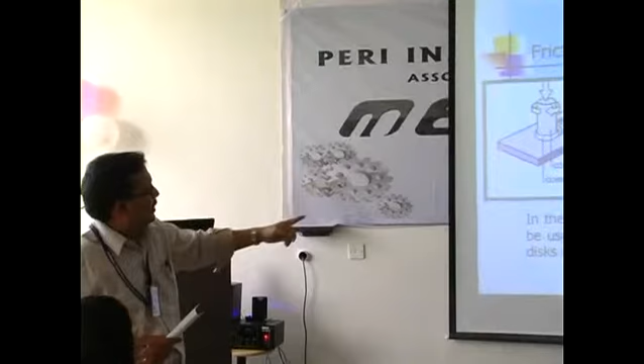So by traversing a workpiece underneath a rotating consumable, deposits can be laid onto the workpiece. See, machining you do normally, what we do, the purpose of machining is to remove the metal. You want to shape a particular component, you melt it, pour it in a cavity, and after solidification you get a component. Or otherwise, you have a component, remove the unwanted portion, you get a component. Or otherwise, you heat it to a red hot condition, blow it, make it to the required shape, you get the component. But this particular process is different - you have a material, you apply metal over it to get the required shape.

Are you able to understand what I mean? This particular technique, what do you call it? You call this one friction surfacing. This is a wonderful technique which you can generate in a milling machine, but of course you need to think how to go for it, a vertical milling machine. When you rotate it, you need to force the metal, but your milling machine should have that capacity, and you should have some technicians around to work on this.

So particularly brake disc drums - in automobile vehicles, the brake disc keeps on wearing because you keep on using the brake, that rubs and goes off. Normally what we used to do is replace it with another one, or otherwise you can go for this technique, you can generate it. You go for surfacing and generate, you can remove the worn-out portion. Now that is what is wonderful here - the most wonderful thing is you can remove the worn-out portion.

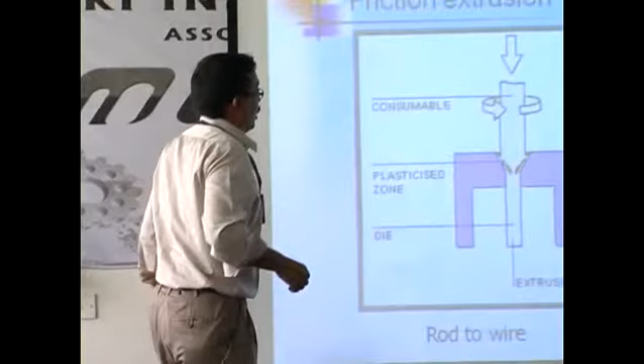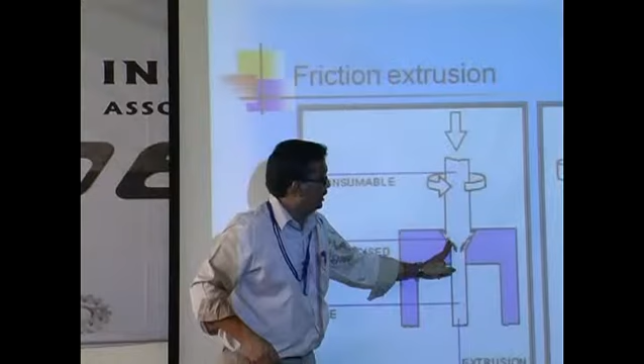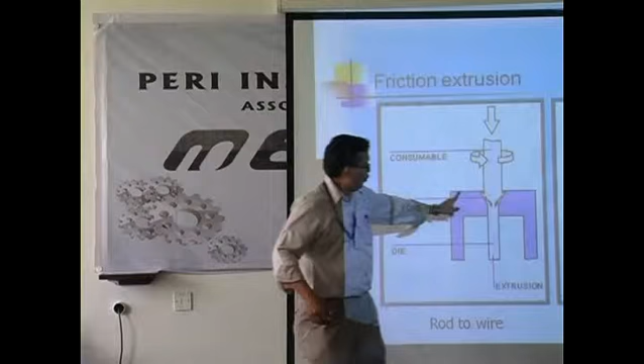Now what you do? You have a rod. Now this is a tapered portion. Now what you do is you try to rotate, apply pressure and rotate. Now in this region you are going to produce a plastic state metal, same as how I told you for the friction welding. You got it what I said? Now once you produce metal in plastic state here, because of this force what you are applying, you can extrude. Are you able to understand what I am saying? So this process is much easier than the ordinary conventional process what we have right now.

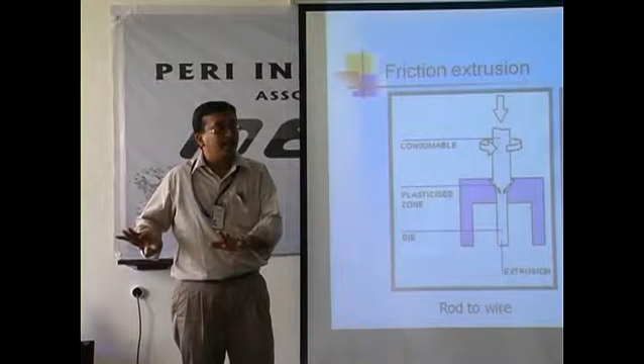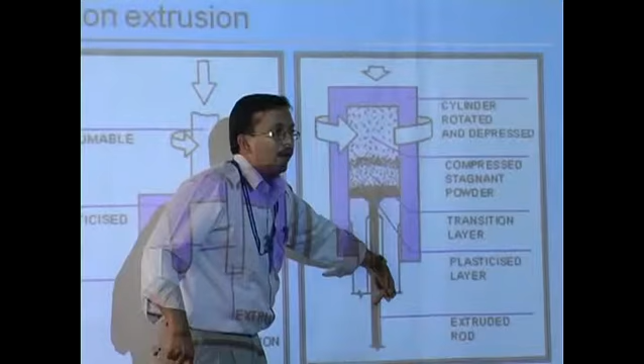The other one, when you go for a wire drawing, normally what we do, we put the metal in a plastic state. When we move this ram up, now what happens? You have an opening here. Now the wire is generated. Am I right or not? Now here is a technique, the friction technique.

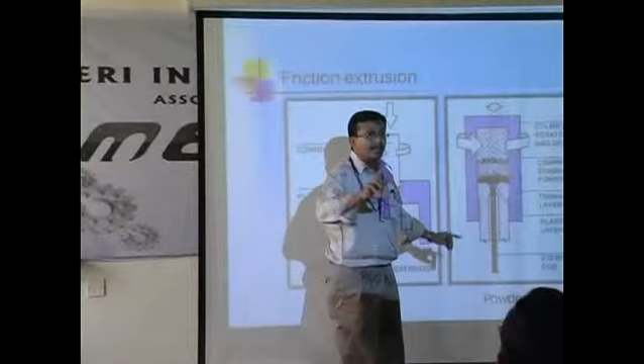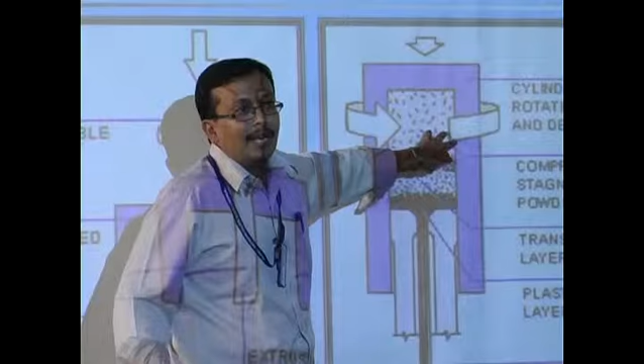Now what you do, in the conventional method, this is stationary. Inside you have a metal in the plastic state. You understand? When you move this ram up, this metal will be squeezed in. Because it is in plastic state, it will come here in the form of a wire or rod. You got it what I said?

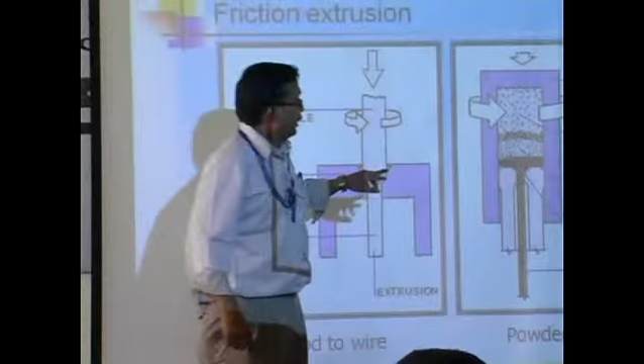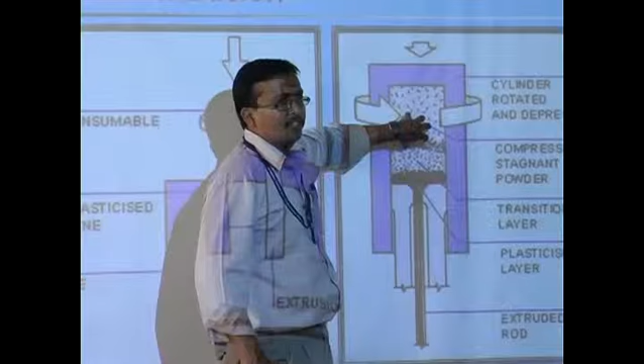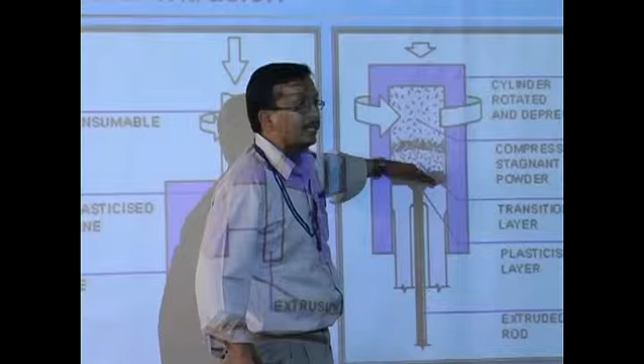Now here what I am going to do, you have a metal in the powder from the scraps generated in your machine shop. What you do is you just fix it inside, rotate it, and apply pressure as well. So now what happens? Metal will be here, because this is in the compressed state. The metal undergoes a severe friction, which makes this scrap to be in the plastic state. Now that can be easily drawn. Like this, you can do it in a workshop.

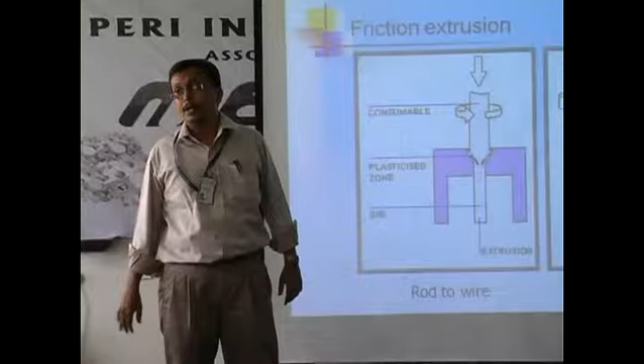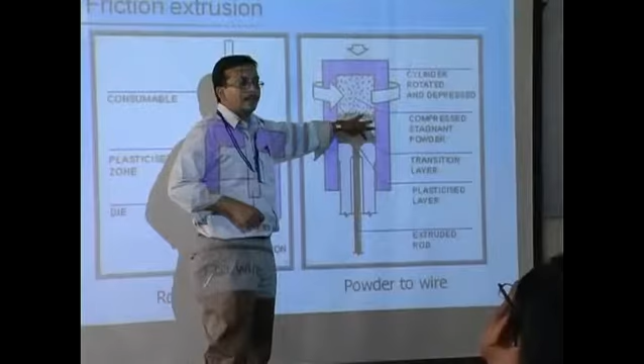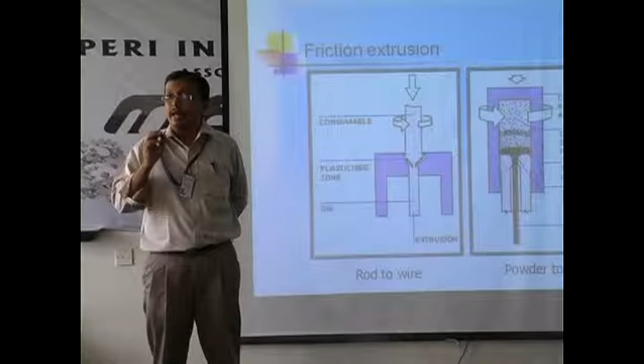This you can do if you students in third year think about a mini project. Just prepare a die, put scraps inside, try to rotate and draw it. Certainly you can go for that, right? But again I am telling you, because you are going to work with metals at high temperature, that can create harm for you. So that care has to be taken, utmost care.

Now I will show you one particular process, and probably you can understand how easy it is. Now all the metal scrap which is available is just put in a die, and this is mounted in a rotating chuck. Very simple. And now what I am going to do, with this one, I compress it. When I compress it, I have an opening in that plunger. Now it is going in. Now what is going to happen? On the other side, it is going to give you a wire.

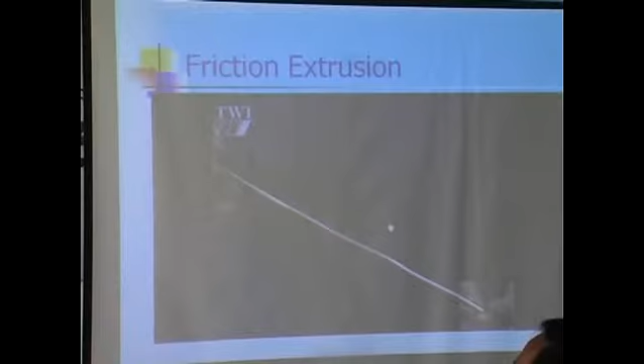This I think even a third year student working on a design and fabrication project can do. Now what is design here? The die design. Probably you can concentrate on that. When you say design and fabrication, design should be there, fabrication should be there. Otherwise that cannot be evaluated. You should have design. The die design is there.

So by changing the RPM and the plunger pressure, now again that we cannot measure. But of course, with the hand, human force, you can create some attachment so that you can push the plunger inside, right? And you can do final projects. Probably you can work when you change the RPM with same constant pressure. Now how the rod is made, what are the mechanical properties of the rod. Probably you can think about that, right?